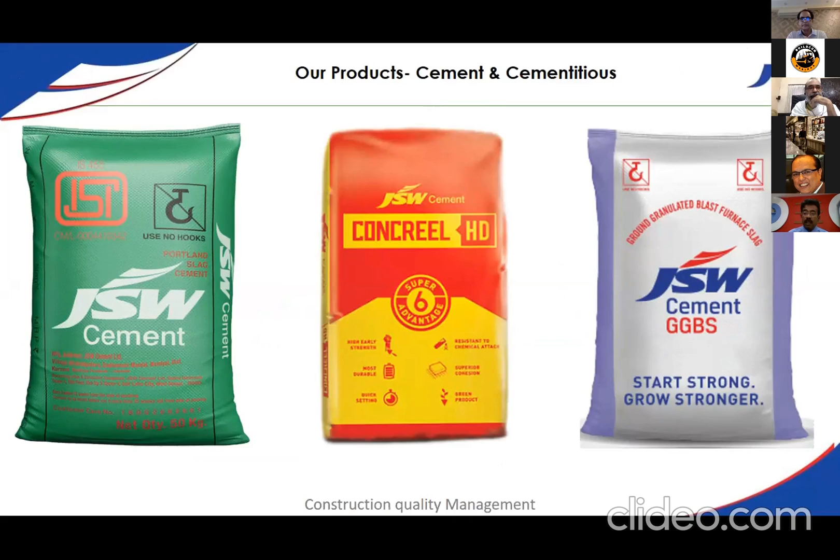Which we use to make very eco-friendly products, what Dr. Ramchandra was talking about, how to make construction eco-friendly and green. Most of our products are very eco-friendly, where we use this process material from our upstream industry like energy and steel to make eco-friendly products.

Coming back to our core topic today, construction quality management, why it is very important. Being construction industry professionals, we all know how the quality of construction is deteriorating every day in the Indian context. Dr. Ramchandra and Dr. Vinod Kumar talked about how, while constructing a road, maybe a concrete road or a bituminous road or any building, even when the design is perfectly done as per specifications, we are seeing a lot of potholes.

Dr. Ramchandra was telling the design life of the bituminous road is 5 years and concrete road is 20 years. Friends, I am also seeing a lot of bituminous roads being executed, a lot of concrete roads being executed. When we see the roads laid during this rainy season by BBMP contractors and others, by next rainy season the roads are not there, completely gone, lots of potholes caused.

Now roads also, I am seeing a lot of cracks coming, it is not done as per quality. So whether we construct buildings, roads, or bridges, whatever it is, quality is responsible. The background is that construction, as Dr. Ramchandra was telling, is not done by only engineers or only architects.

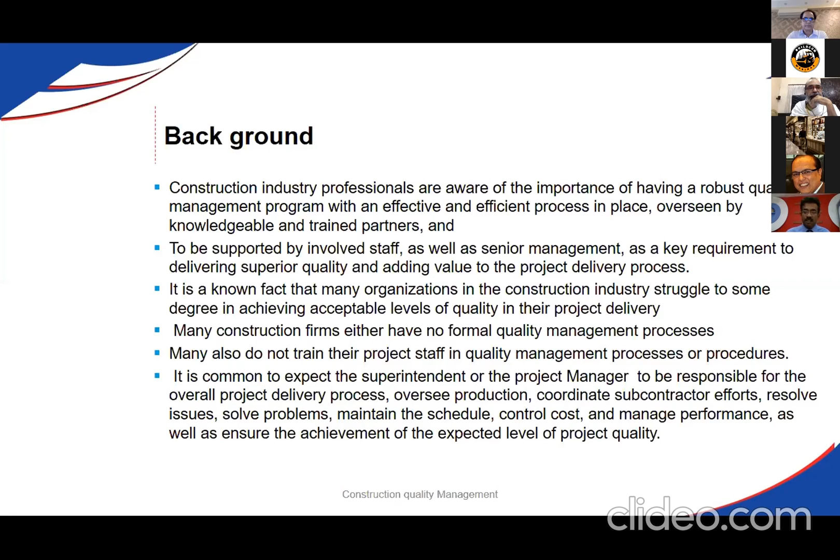Coming to quality management systems - all these things were not there earlier. These are all the latest developments after 1990 in India, when the economic things changed, when we started liberalizing our economy, and more and more construction started happening after 1990. So we got involved in developing very good quality systems.

Quality management systems refer to planning, quality assurance, and quality control. We have to do proper planning and create a document to measure the quality and also control the quality on the field. We must create very good documents, very good planning. If it is not executed at the site level, then it's going to be waste.

Who are the people executing - engineers, masons, contractors? They are the ones who are going to execute. So the main goal of the construction industry is to ensure that construction is executed successfully, with quality stated at the minimum cost.

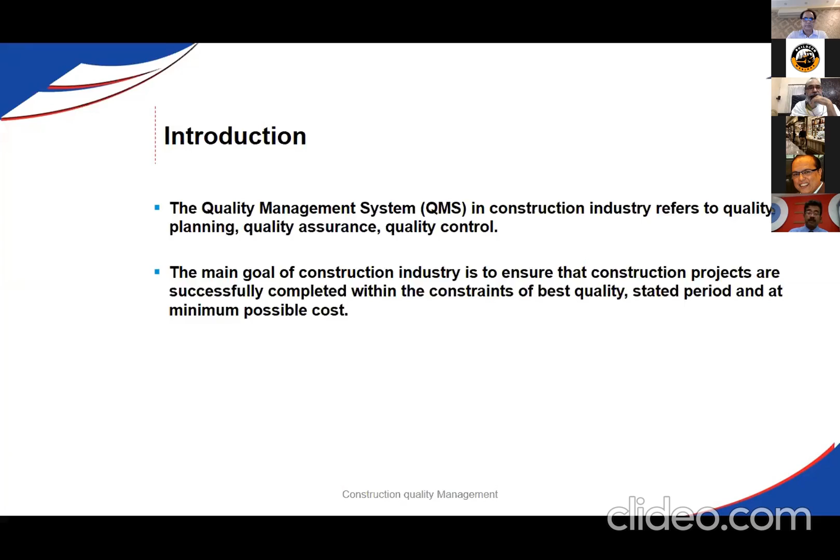So friends, what is quality management in construction? Quality management in construction is the policy and procedures put in place, organized to deliver quality to its customers. When customers give the project to us, it may be a government agency, a private builder, or a small individual house builder, we will be definitely looking at how we are going to improve the quality parameters. This is very important.

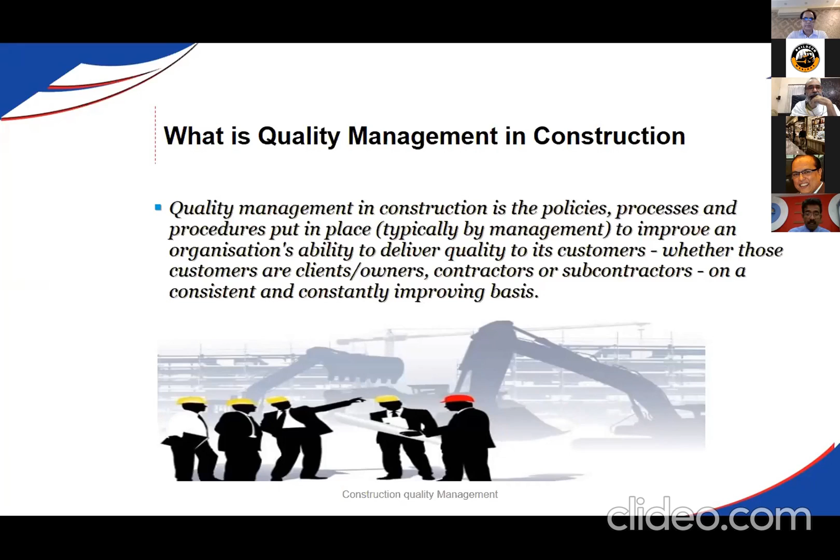Previous speakers have clearly told that if you don't construct buildings, structures, or roads properly, then we are going to have serious problems within 3 to 4 years.

So how has the journey of quality happened globally? Pre-World War II, people were only looking at quantity, not quality at all. It was mass production after the industrial revolution, and scale of production was very important. People were not looking at what quality of product, what quality of shirt they were wearing. What kind of motorcycle, whether using a Maruti or a Benz car, they were not looking at that. People were not related to quality, they were looking only at quantity.

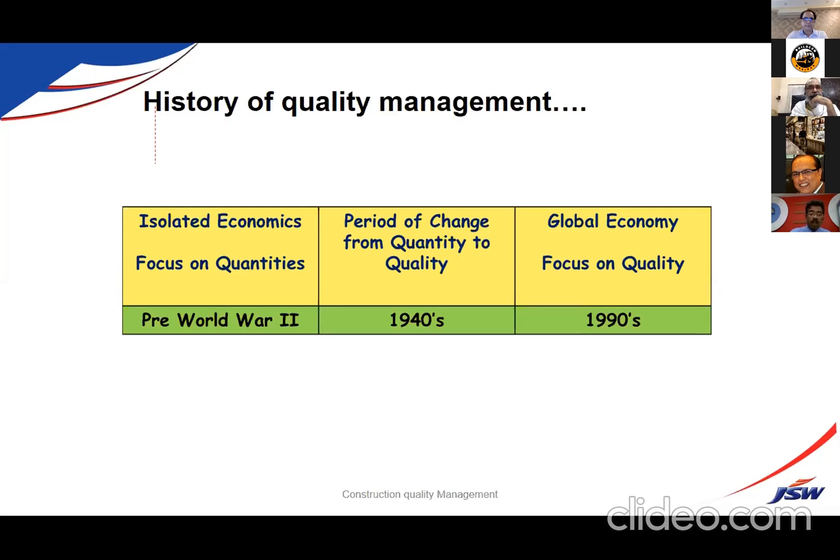The period of change happened from quantity to quality in the 1940s, after the Second World War. Japan got destroyed almost entirely, and it's the first country in the world that started implementing quality principles. They invited eminent experts from America - America was not focused on quality at that time, only quantity. They invited those people to implement quality systems in Japan. Today, when people talk about quality, they always refer to Japan or Germany - these are the countries that embedded the idea of quality in whatever work or process they do. Global economy focus on quality came, as I already told you, after 1990 onwards, when our Indian economy was liberalized.

There are many gurus in quality management systems, so here are certain quotes from various gurus. Quality means fitness for use - this is from Mr. Juran, Joseph Juran, one of the quality experts. He talked about the preliminary definition of quality. Then coming to quality as conformance to requirement, that's from Philip B...

Crosby is the one expert who talked about quality as per specifications. Another guru in quality management is Edwards Deming. Deming's principles are famous all over the world.

Quality should be aimed at the needs of the consumers, present and future. So quality is nothing but, if I do a road work, a white topping road or maybe a bituminous road, it will last. It's not that I execute it and it lasts just one month till the tender period. It should be for the future. The completely designed life should be adhered to.

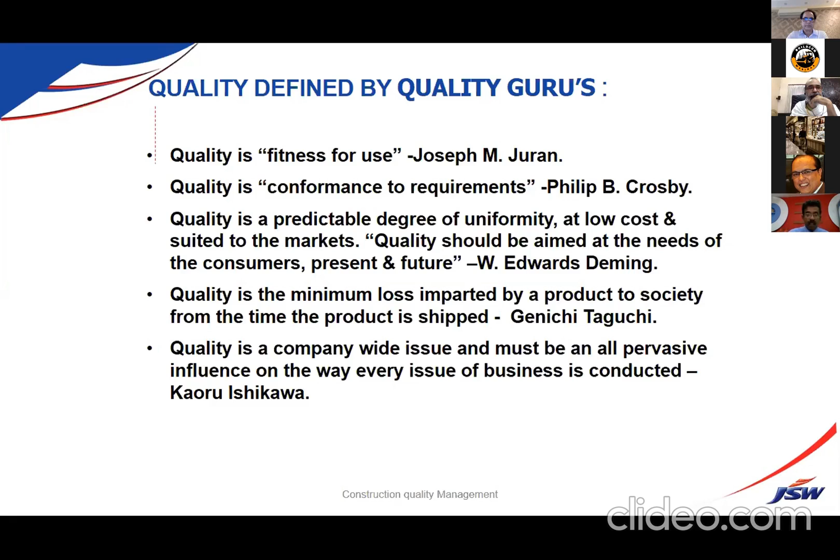So many speakers are there, I don't want to spend much time. Coming to the equation of quality: quality is equal to performance divided by expectations. So friends, we know, always look at performance. We may have the best products in the world. We may bring a good car, an automobile, a scooter, a TV set, any gadgets, or any mobile.

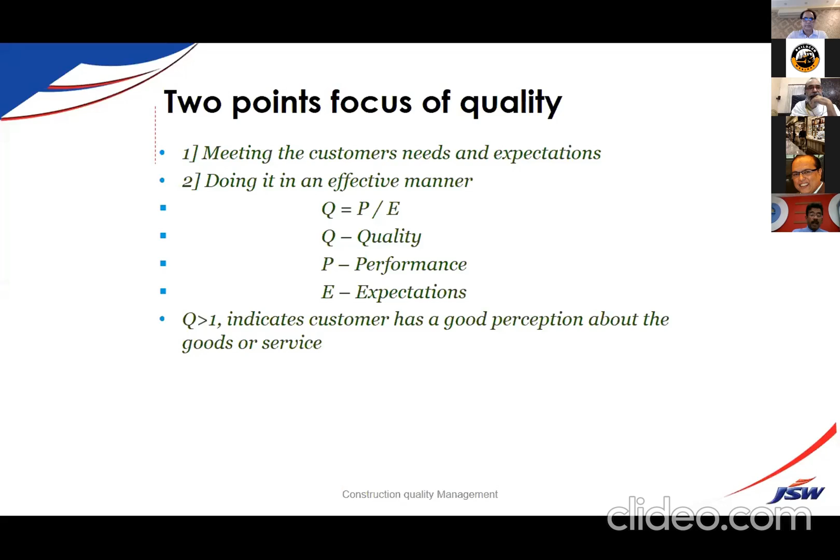So we look at performance versus expectations. If performance exceeds the expectations in any product, delivery, or service, we say the quality is good, perception of the customer is very good, or service is very good. So performance should always exceed the expectations of a consumer.

So what is quality in construction? When we look at construction, how do we measure quality in construction? Completing the project on schedule is one aspect. Executing it, meeting the owner's requirement within budget.

We have to fulfil the specification mentioned in the contract. Executing the project as per the specifications given in terms of concrete, steel usage, finishing work, and avoiding disputes and claims. So I say I have taken more time, I need more money, I cannot do it, I have underquoted - we should not enter into any disputes at all.

And also ensuring facilities and products perform for their intended purpose. Whatever purpose you have intended, it may be a building or any product, it should be put to complete use. A structure constructed for a marriage hall should fulfill the purpose of a marriage hall, a convention center, an IT park, or a road constructed for vehicle usage should serve that purpose. That is the main idea of quality in construction.

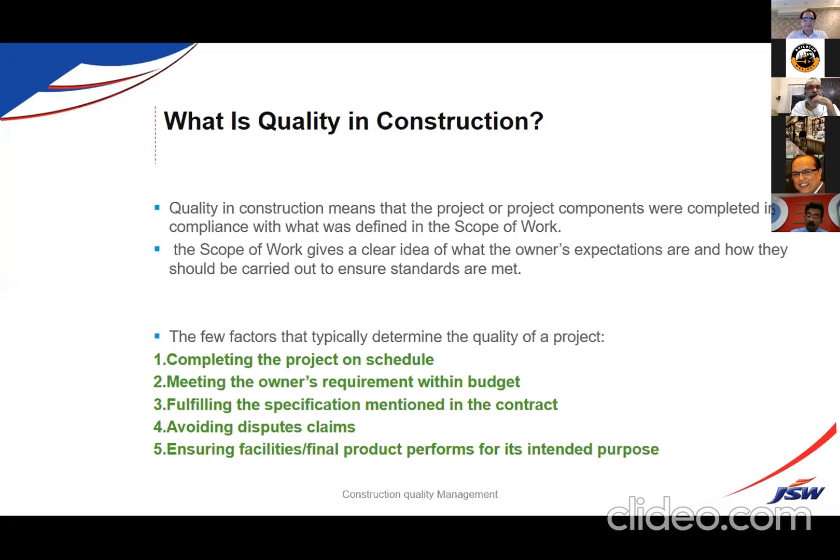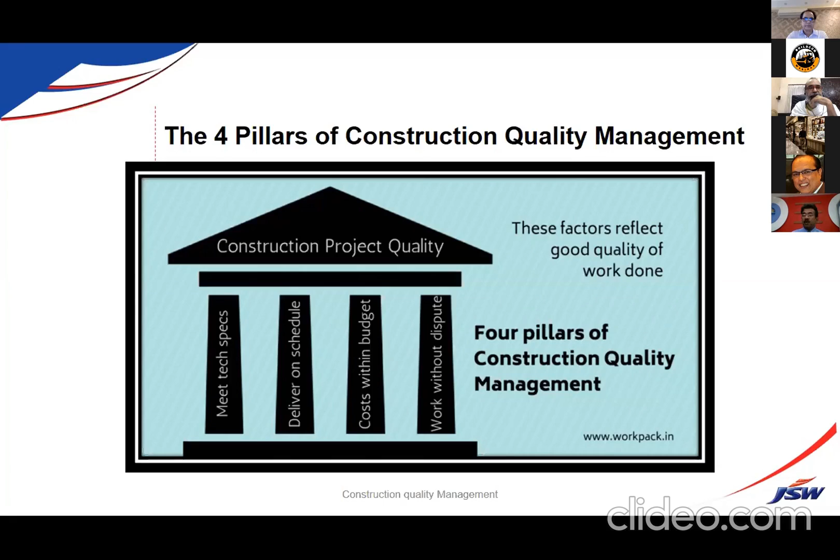So there are 4 pillars of quality management: deliver on schedule, so on-time delivery is very important, you should not delay come what may. Then work within budget, and work without dispute. These are the 4 pillars, the hallmark of construction quality management.

Now, evolution - how can quality be maintained? Inspection is very important. Whatever works we do, when we receive concrete, we have to check for the slump. When we place the concrete, we should look at the compressive strength at 3 days, 7 days, 28 days. When we receive steel, or any raw material - tiles, aggregates, whatever materials we receive for construction at site - we need to get the MTC certification. That is very important.

Quality control is important - developing quality manuals to measure the process, whatever comes, so it should be as per specification. When you receive any material, cement or cementitious material, aggregates, finished products, whatever product - for every product we have standards, so it should be measurable.

Assurance is important - recording. Whatever products and materials we get, whatever process and work we execute, we should measure it. Nowadays people are measuring using drones, having cameras installed while work is executing. So online photography, all these things have come now. New technology, new innovation have come so that the work is properly recorded, and we can always find out what went wrong and what did not go wrong.

And coming to the final point, total quality management - TQM is measuring the overall aspect in a project. In a building, we have a sanitary contractor, plumbing contractor, waterproofing contractor, civil works contractor, AC installation contractor, landscaping contractor, and so on. There are more than 100 to 200 agencies working in any project site. So a project manager - there are many project management consultancies now, which was not there earlier. After liberalization, with many projects coming now, we have project management consultants using these techniques and systems to measure the quality at site, so overall objectives are achieved.

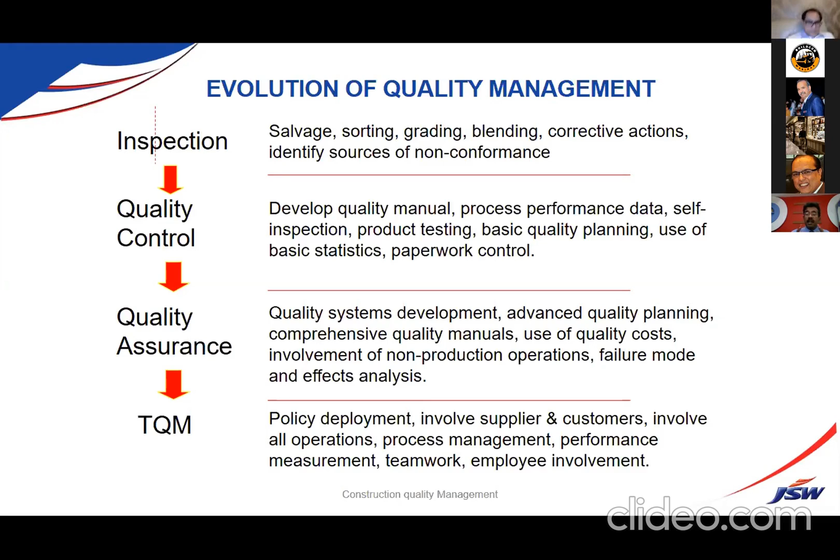So that is how you measure the quality in construction.

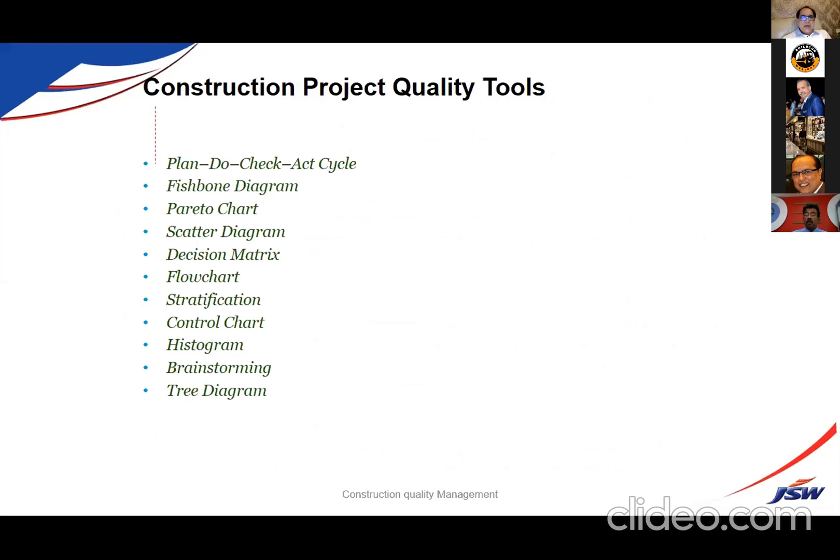PDCA cycle, fishbone diagram, Pareto chart, decision matrix, scatter diagram, flow chart, histogram, tree diagram. There are so many tools to measure quality on various aspects.

So factors that affect construction quality management. What are the factors? I already told you, friends, the material - low quality material. We should not allow low quality material to be supplied to any site at all.

And vendors and supplier failures. So enlisting a suitable, good vendor who always delivers on quality is very important. That's why in contract they specify the brand of cement, brand of steel, brand of tiles to be used.

Not allowing anybody to enter and supply material just by dropping the price. So that's very important. Subcontractor mishandling should be avoided.

Failure to document changes - there will be continuous changes based on the client requirement. The architect produces drawings, gives them to the structural consultant, comes to PMC. So if you don't get yourself updated always, it's going to be a problem.

Last minute changes, miscommunication between the teams - architects, structural consultant, project management consultants. If there's a miscommunication, then the quality will suffer.

Complexity in designs - design should be simple. You should not design a building which cannot be implemented, any great design that cannot be executed at all. The design should be simple and should be able to be implemented easily.

So like that, we have ignored audits and testing. We don't test it properly - periodic testing as per the norms - and you don't do the quality audit.

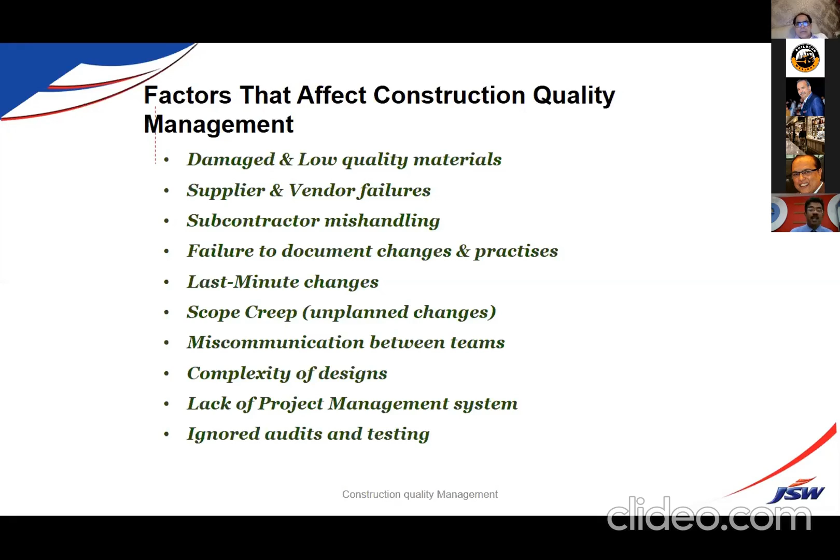Coming to how quality is implemented - a quality manual should be prepared, quality procedures documented. There should be a manual, a plan, and forms and formats are very important to assure quality at every stage of construction, starting from site clearing to excavation, putting up your site office, and everything should be properly documented and available whenever it comes for inspections.

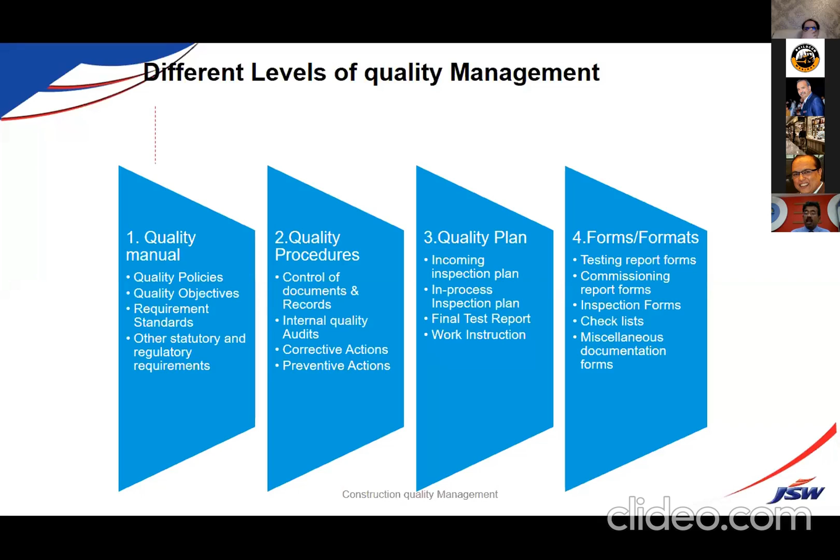So what are the objectives of quality management, friends? Should have zero defects. Let's say I make a concrete road - there should be no cracks. I make a bituminous road - no potholes. I make a building - no cracks, no seepage of water, no carbonation, no chloride attack, no attack on marine structures, no deterioration.

Identify and solve the problem before the customer does. The customer should not point out a problem that you've already executed - you have to repair it. So the client engineer should not make a remark on your quality. You should be able to execute any project or work without any remarks.

Establish true quality control by making quality built-in and not inspected. So built-in quality systems - when we talk about quality we always talk about Toyota, just in time. They are the people who implement quality systems globally. Manufacturing system, the best in the world.

So it should be built in - how are they able to make it just in time? We have a Toyota factory in Bangalore. I have visited a couple of times and seen their quality systems. So these are very good companies who implement quality systems.

First time, every time, first time - that should be the mantra of construction when we execute projects.

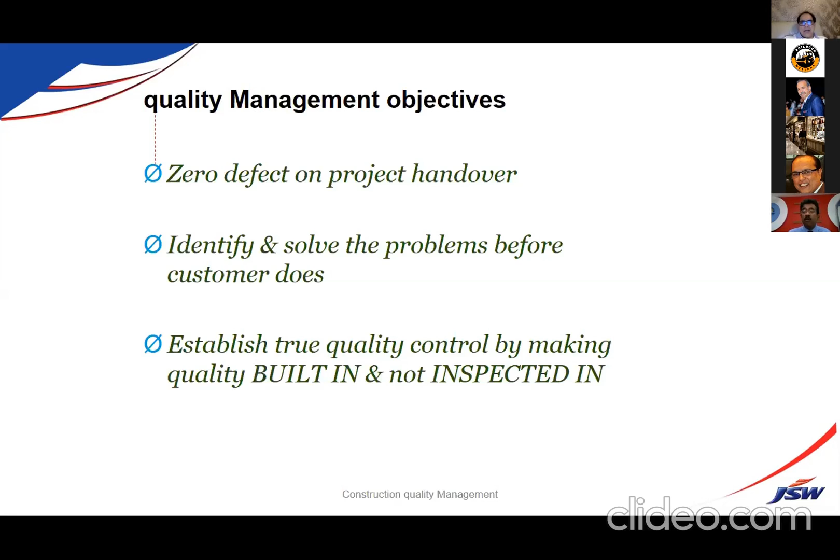So why quality management? Don't make any mistakes and your work can be much faster. Fewer rejections - rejections are not there. Clients are not angry, consultants are not angry on your quality of work. Reduce, if not eliminate, customer complaints.

I know customers always complain, we always talk about that. So satisfying the customer is like satisfying God - in Japan they talk about the customer as God. We should embed that quality in our mind, that the customer is God, so you should not complain. So improve customer relations.

I know complaints are going to come, so how do you overcome it? You should not fight with the customers, should not fight with the consultants or architect. The contractor should have a mindset to accept the mistakes if he has made them, not to challenge it. Accept the mistake, be ready to accept changes and rectify it quickly, so that a stitch in time saves nine.

Improve supplier relations - in any project we use a lot of raw materials: cement or cementitious materials, aggregates, tiles, fittings, steel, everything. So there should not be a shortcut - if the good vendor is not supplying, I will go to a second or third vendor.

So you should not compromise on the quality. Always shortlist 3 vendors for any emergencies, because any problem may happen with the first vendor. So the second vendor should be ready, or share the suppliers. You divide the orders between 2 suppliers and take the material so that you can always immediately change over.

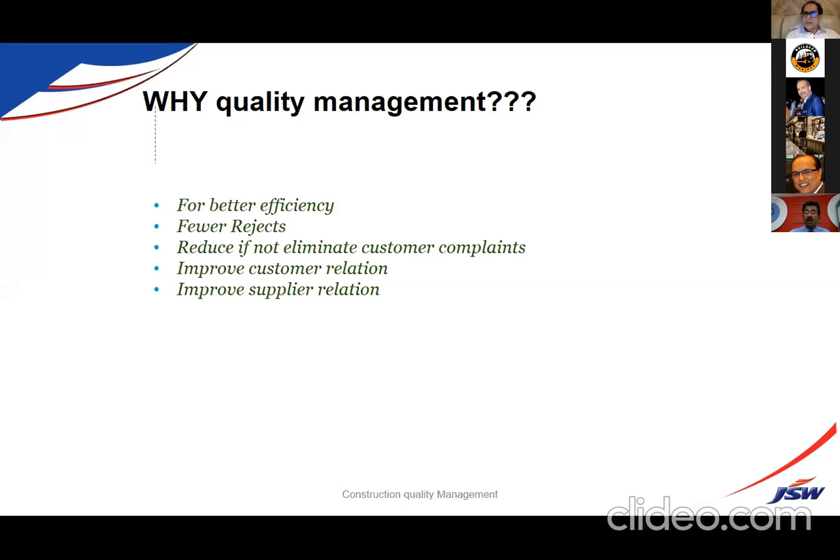What are the things? Juran's quality trilogy, the quality guru. So we talked about quality planning, quality control, and quality improvement. So continuous improvement - quality is not a one-day topic or one-day subject or one-day formula. It's continuous. What you have done today may not be relevant tomorrow. So how you improve your quality is very, very important.

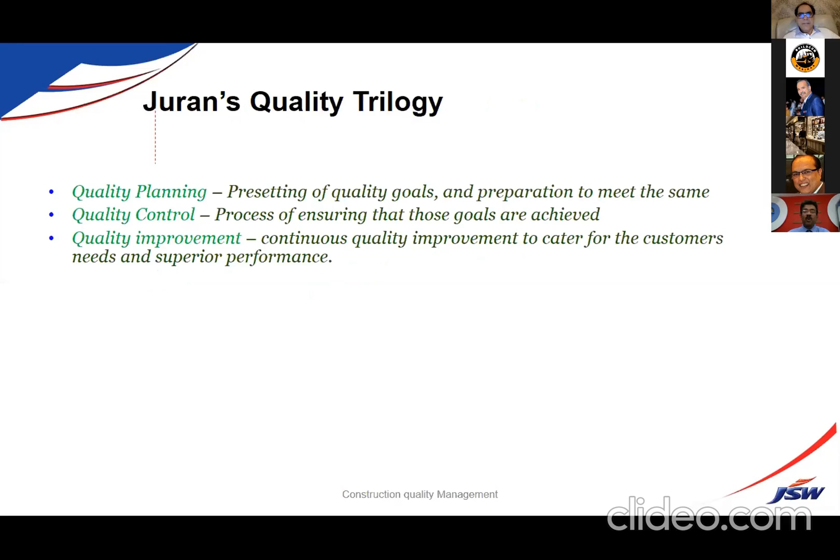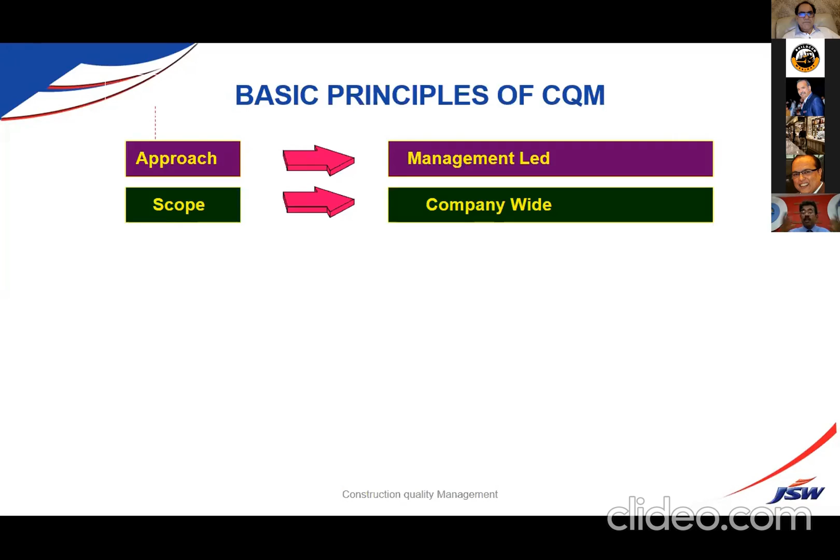So the basic principle of a construction quality management approach should be good, should come from senior management. So senior management designs a quality policy for an organization. That's very important. Many shares of many companies are evaluated not only on the vision and mission program, but the quality program, the quality policy the company has. So that is paramount importance. Each and every company having a quality policy is very important, and they must adhere to that. Senior management is critical in implementing the quality systems in an organization, in a project.

Scope, company wide, scale - it's everyone's responsibility. Quality, as I told you, should not be said to be just the site engineer's responsibility or the project manager's responsibility. No, each and every person working on site, starting from the security guard to the waterman who waters the concrete for curing purposes - such is the importance. He plays a very important role in the concrete attaining strength.

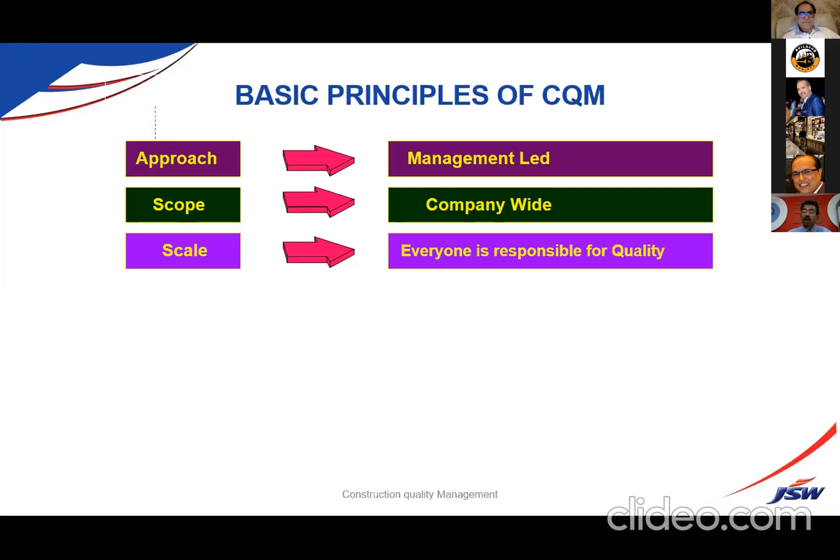He may tell lies. There are tall buildings and all - he may not go and do the water curing at all. He may document that he has done it. If he does not adhere to the system and take responsibility, your concrete will always fail.

So that's what the philosophy is - prevention, not detection. Prevention at every stage is very important when we implement systems. That means we have to put robust systems in place so that detection should not become like a policeman - after theft has happened, some robbery has happened, some murder or rape has happened, then people go looking. How can you prevent it? Many countries have implemented robust systems, like Singapore or like the Middle East, Dubai - they have put a robust system in place that people should follow.

So we should not find defects. Prevention is very important, and right first time.

So whenever we do any project, any concreting or anything - concrete, as Dr. Ramchandra has put it, is an unforgiving material. If you make a mistake, if you don't compact it properly, it will start leaking the next day. It's unforgiving. If you don't do it properly, it may develop cracks and all. If a crack is developed, it may absorb moisture, absorb water and all. It's unforgiving - any construction is not forgiving. If you make any small mistake, it causes damage to the structures and also affects the serviceability of the structures.

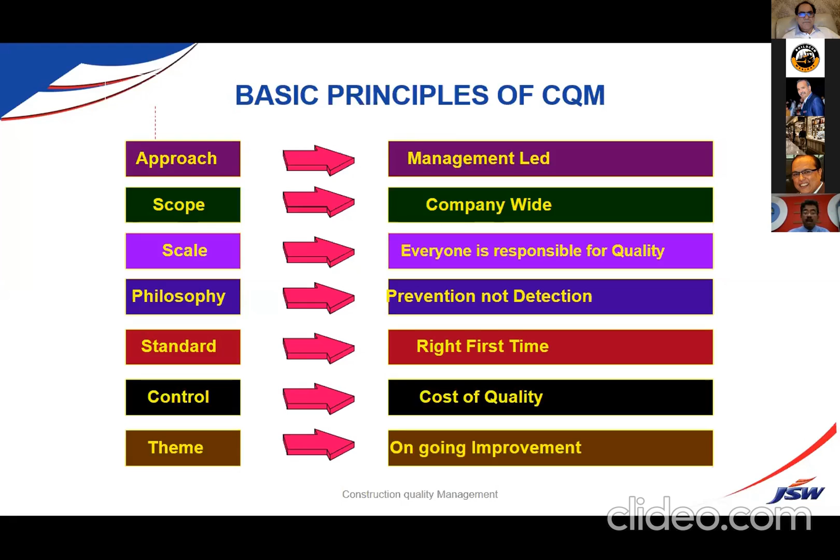So control - cost of quality. Cost of quality comes with control. It's very important. The theme is ongoing improvement. Continuous improvement is the hallmark of quality.

So friends, as I told you, the transition towards construction quality management - quality control, quality management. So there's a comparison: the past looked at faults, quality management looks at the future. It detects faults in control, but prevents errors. The past would look for guilty persons, look for defaults in the process.

So we always try to blame others. When concrete fails, they say cement failed, GGBS problem, admixture problem. The contractor will never take the blame on themselves, come what may. The moment there's any failure, they call the cement guy, call the GGBS guy, call the admixture guy, and put the blame on them - saying something has gone wrong with them. But these are all processed, manufactured products. Absolutely, there is no problem at all in the quality of any cement coming from a factory - latest technology has been adopted, and similarly for admixture manufacturing.

So instead of blaming everybody, find out what kind of water-cement ratio you have used. Whether you have properly mixed the concrete, whether you have checked the slump - look at your own mistakes. That's very important, not blaming.

Instead of accusing people, help, moderate, and facilitate. Punish and motivate - punishment is always there, we always punish, this is the penalty. But you should correct him and motivate him - don't do it next time, this is the way forward. Putting the system in place is very important. Micromanagement.

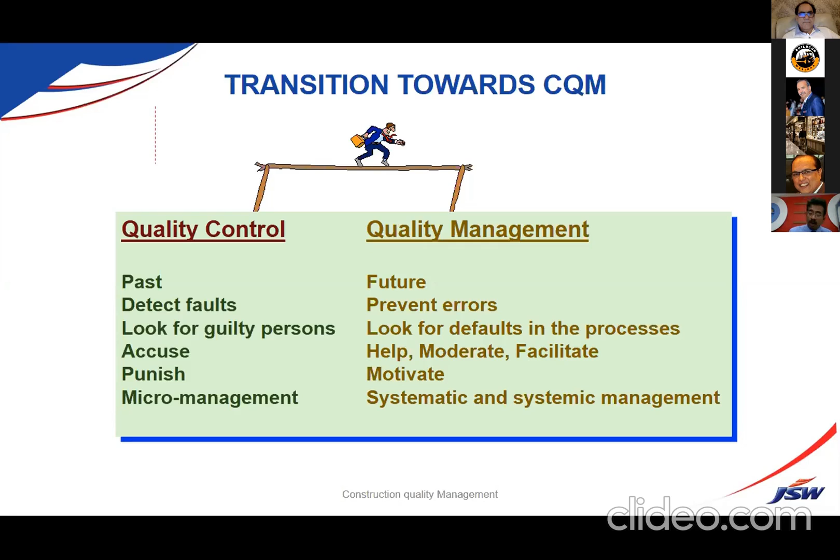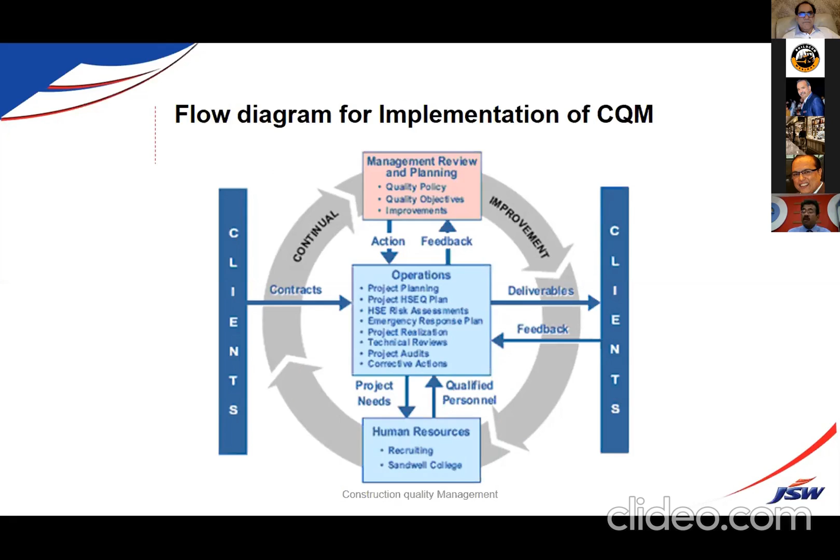So, flow diagram for implementation of CQM: the client gives contracts with specifications and all. The team's responsibility is to design, construct, implement, and hand over to the client, and should get positive feedback. When you have positive feedback from the client, definitely you're going to get the next project also. Whatever quality, time, energy and money you spend, it will give you back with new orders and appreciation. Good certification from a client will get you more projects elsewhere.

So elements prior to total quality management - there's been a different change. Earlier it was product oriented, now it's customer focused. They look at customers as god. Priority is first to service - service is very important. Look at long-term goals, always look at prevention rather than detection, and it's done by systems rather than just operation failure.

It's everybody's responsibility, not only the QC's responsibility. It's the teams, not just the managers, and you should delegate and mentor rather than plan and control. These are the hallmarks of total quality management.

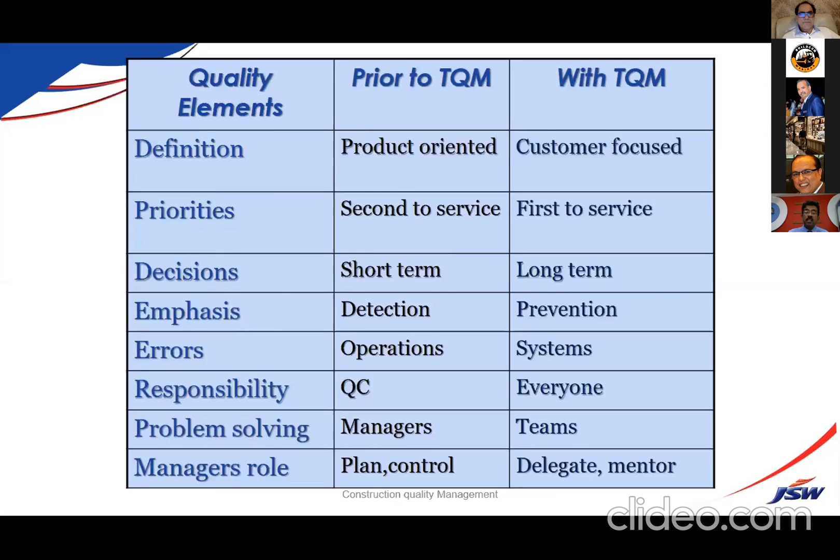So what are the diseases in TQM? Quality management has a lack of constancy of purpose - you should have a purpose. If I want to execute a project, I should have a purpose: in so many days, so many safety hours, so many quality days without accident, I want to execute the project. That should be the hallmark.

You shouldn't have short-term thinking - you should focus on long-term execution and should not look at short-term profits. We should not review employees only once a year in an annual review - it should be reviewed every month. There should not be so much of a gap; periodic review is very important.

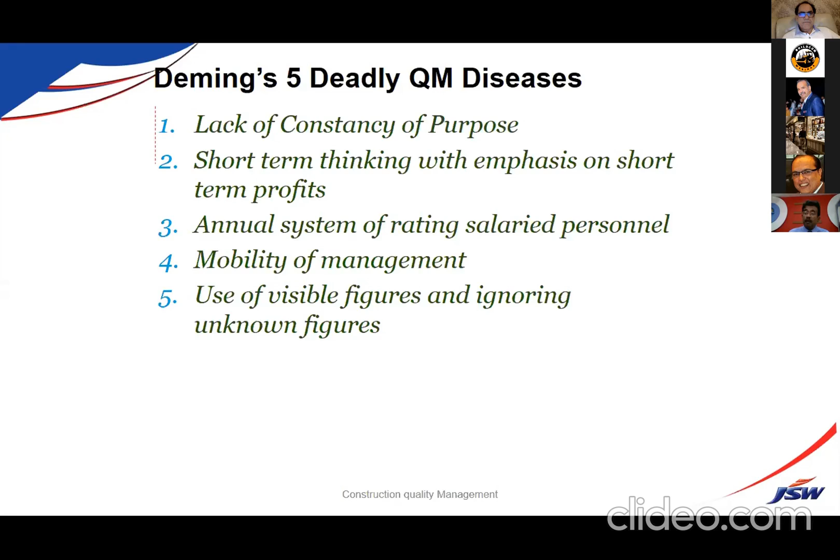Use of visible figures and ignoring unknown figures - what is in front of you, you should see, and don't look at just the theoretical part. Practically approach the problems and find the solutions.

So I've already discussed the elements of TQM. Customer focus is very important, involvement of top management leadership, employee engagement is very important, and you should have a centralized process so there's control on each and every aspect, with continuous monitoring of the work executed and the people involved. If you do all these things, you're going to have continuous improvement in quality and recognition, and continuous education and training is the hallmark of implementing total quality systems.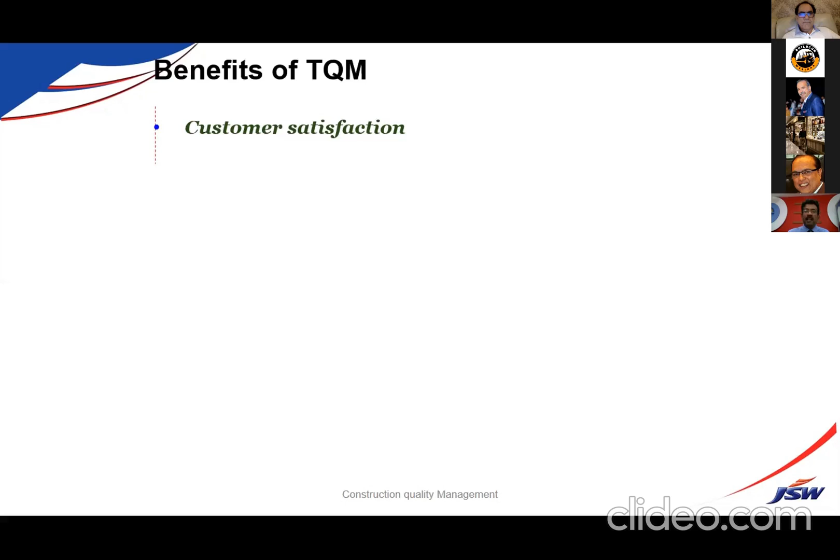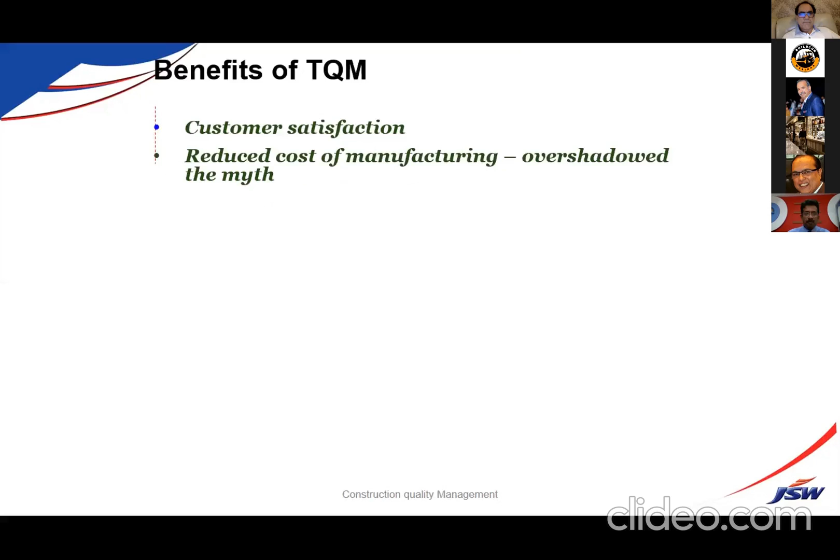So the benefits - definitely whatever effort we show is going to reap benefits. If you invest money, time and energy in implementing quality, you are going to get enormous benefits. Finally, the customer is going to be satisfied with additional work, you will get a bonus for doing it on time, you reduce cost, reduce rejections, and increase employee productivity.

Employees are also satisfied - they don't make mistakes and complete the job on time every time, so they'll also be very happy. This reduces mistakes and increases efficiency. A lot of savings are going to be there when you reduce rejections.

So justification of the budgets - the budget has been given based on actual quantities. If you don't make any mistakes, definitely you can finish any project within budget, and there's no cost overruns. This increases the readiness of the whole organization.

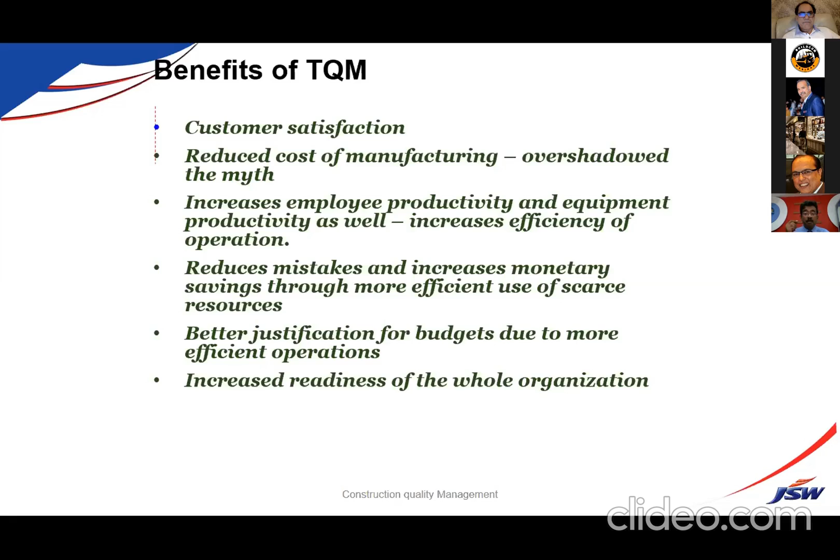So the whole organization will be agile in implementing quality. Like we have big companies in manufacturing, they say okay, 3.4 defects in 1 million pieces - that's called 6 sigma. Many organizations achieve 6 sigma, imagine just 3.4 pieces defective in 1 million pieces. That is the hallmark of quality in total quality management.

When you achieve quality, your structure is going to be durable, efficiency will be there, you're going to get some profits. So that is the hallmark. Many people lose money, contractors, because they don't have a good team to execute any projects.

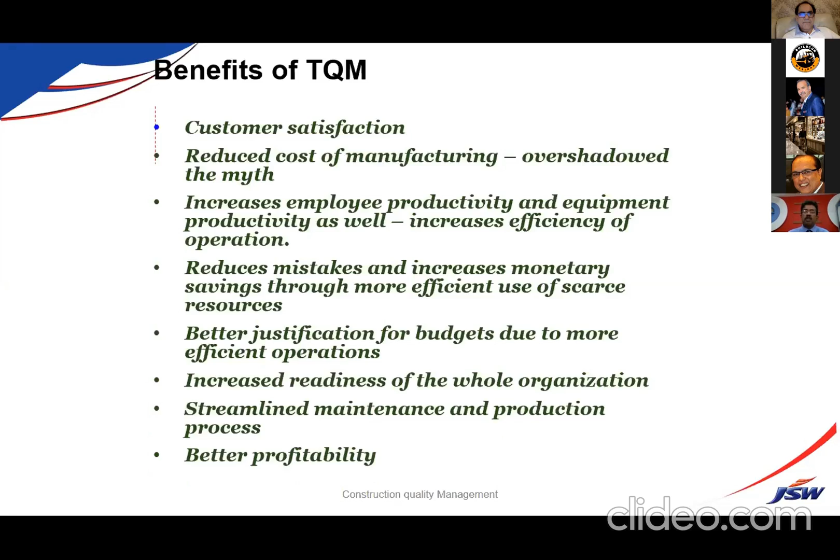Coming to total TQM, I've already discussed all these parameters. This is a flow chart showing how we can implement total quality systems by clubbing all the systems together: suppliers, material vendors, employees, consultants, client, and finally the approving agency. So putting all the people in a single picture, how we are going to integrate together.

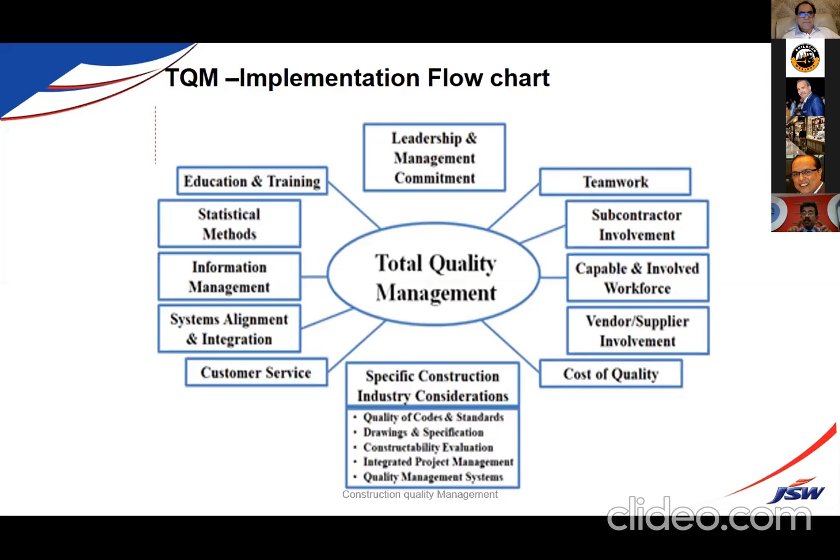It's very important. The way forward for any quality management is that robust systems are very important. It should be top to bottom. The quality system should be starting from the top people, not just the responsibility of a small person, maybe a mason or a carpenter. It should be aligned to the organization's goals and achievements, and it should be planned. CQM requires a defined and clear framework to ensure that every time we achieve quality in a repetitive, continuous manner.

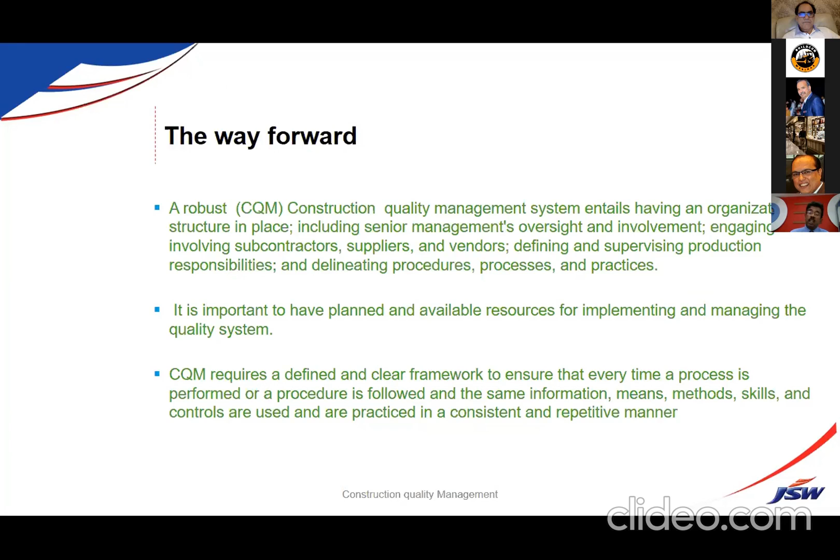In conclusion, I'm only giving a small picture to implement quality systems in any construction project. The organization should have a system properly in place, with trained manpower, management, suppliers, vendors. Putting all these together, we can achieve quality. The customer always looks at service, and is not ready to pay very high.

Should be very competitive. For any metro project or highway project, they always call for technical bid and commercial bid. They will not give the contract to a contractor who is always L1 if he is not technically superior. The contract may not go to him nowadays. Earlier it was only L1.

It may be any contractor, Tom, Dick and Harry. But now they're looking at evaluating whether he's technically qualified properly, whether he has the manpower, resources, machines, plants, financial resources, and experience of having already executed projects of the same scale. These are the things that come into picture when a tender is given to a contractor.

So it's very important. A company committed to quality always has customer satisfaction. Customers stay with them, they achieve repeated orders and repeated profitability, and they will be the leaders in the race in developing an ecosystem where quality constructions are implemented.

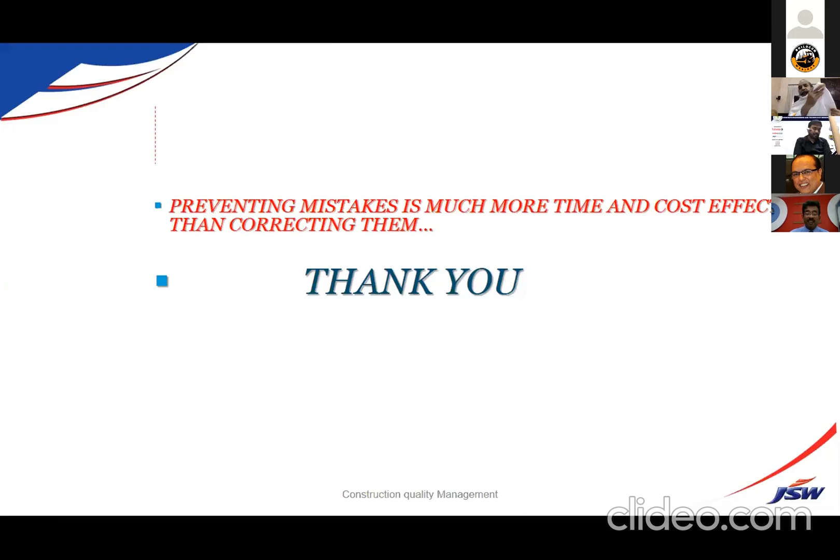With that word, preventing mistakes is much more time and cost effective than correcting them. Correcting always costs more money, more time. So prevention is better than cure. With that, I would like to close my presentation. Thank you very much. I thank FutureX for providing this opportunity. Indian Concrete Institute is the associate organization along with FutureX. I would like to have many more programs. I also thank Vinod Kumar, Madhukar, and Dr. Ramchandra for accepting invitations from ICI to be part of the event. Thank you.

I guess I'm not muted this time. No, perfectly audible. Thank you, sir.

This was Dr. L.R. Manjunath. Sir, basically you have given us some key mantras for a successful business, explained through your quality management approach.

This is some kind of blessing in disguise, what we have in this COVID situation. This platform or seminar is only conducted because of COVID-19, we have to accept it. This is going to be continuous now, we all moved from the physical platform to the online platform. We should thank COVID, for every distress there's an opportunity. So this is an opportunity created by an unforeseen enemy.

Very rightly said, sir. So we have come together, and this is a truly knowledge-sharing platform. We are privileged to have such a distinguished panelist and this detailed discussion about quality management and how to maintain quality of roads in different sectors of the construction industry. One more thing, sir, it's your hard study and well-made presentation, and we all are getting it free of cost.